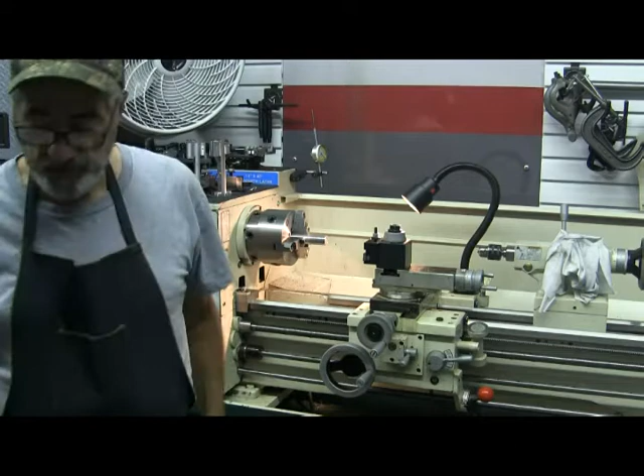Back to crank disc. I've drilled it and reamed it 3/16 inch, and I will chop her off here at 1/4 inch and stick it in the mill and drill a hole and ream it 1/8 inch in the face at the appropriate distance, which we'll cover later, from the center,

for the crank disc pin. It would be easier to hold in the mill if I gave myself enough to hold it with, if I parted it right here and then later parted the 1/4 inch piece off. But I don't want to waste that much aluminum. So I've got a way to hold it in the mill. It's fairly easy.

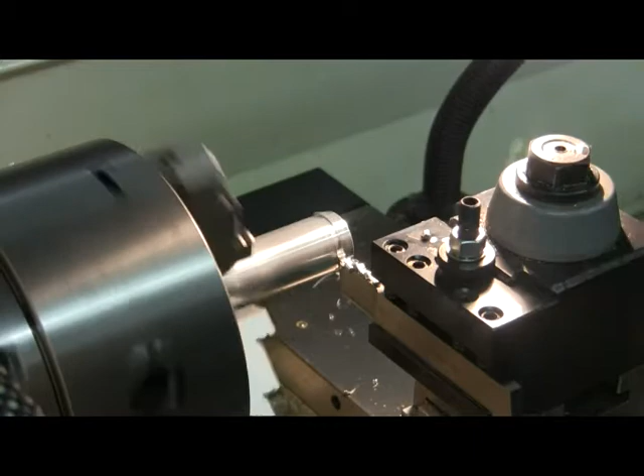Oh, that's kind of boring.

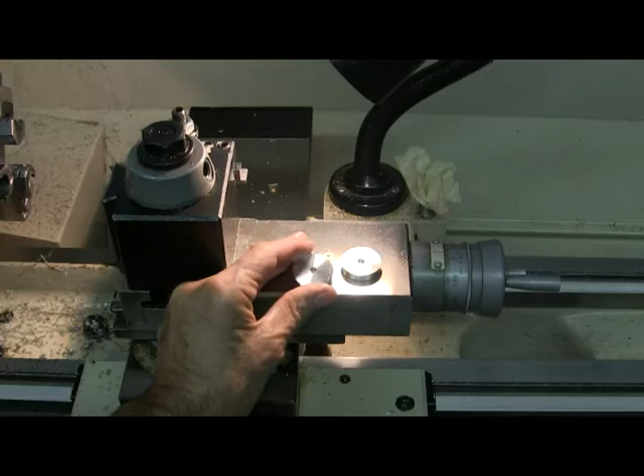That looks pretty good. Two almost complete crank discs. I didn't chamfer this side because this will be the outside, and I want it to be flush with the main shaft. This side on both of them is chamfered a little bit, or was it that side? Well, yeah, there we go. It's chamfered a little bit to make it easier to put everything together.

They're almost complete. I have to stick a 1/8 inch hole right about there, 0.375 from the center, and that's where the crank pin will go.

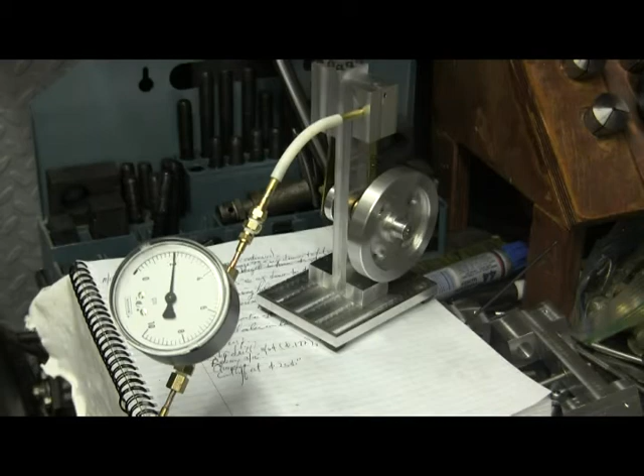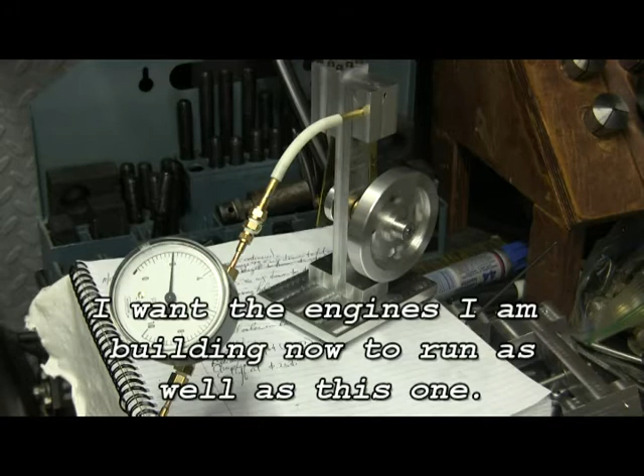This engine is running on 2 pounds. I finally bought a pressure gauge from McMaster-Carr that registers from 0 to 10. So it's running well on 2 pounds. We'll give it a little more.

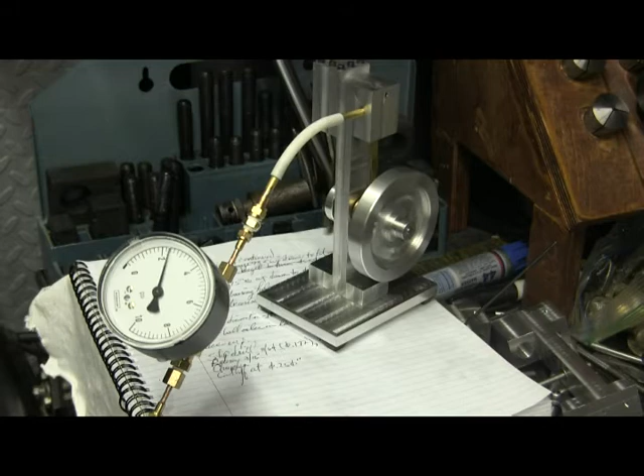There's about 3 pounds. There's 4. Down to about 2.5. So that's the goal for these 2 engines as well.

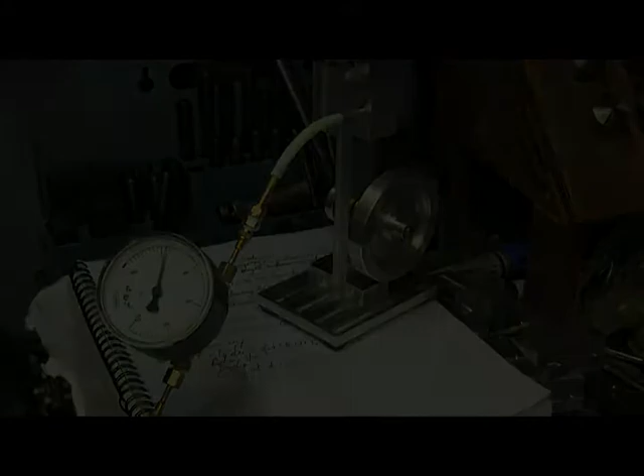That's about 3 pounds, because the bore on the flywheel is not concentric with the flywheel, not centered. I won't run it any faster. I need to rebore that flywheel and re-sleeve it. It's just one of those things I'm going to do.

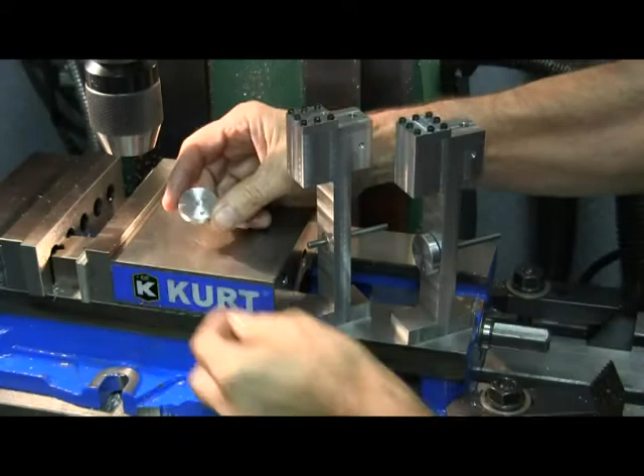Well, I've got both crank discs almost complete. This one's sitting on the main shaft. I need to put a set screw in them to hold them solid on the main shaft, because the main shaft is 3/16 and I reamed the crank disc main shaft hole 3/16 over. No problem.

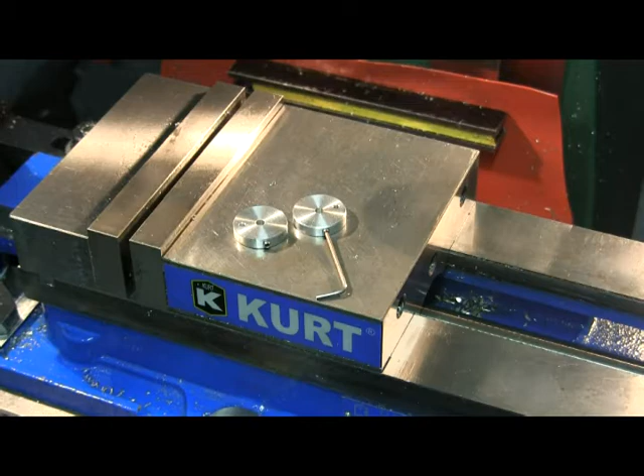In fact, did I do that on this other engine? Yes. This one's also got a set screw in it. The set screw is a little more machining, but it makes for easy assembly and disassembly, rather than pressing the main shaft into the crank disc. So I'm happy. They both have nice 8-32 by 1/4 set screws. That'll hold them on the main shaft quite well.

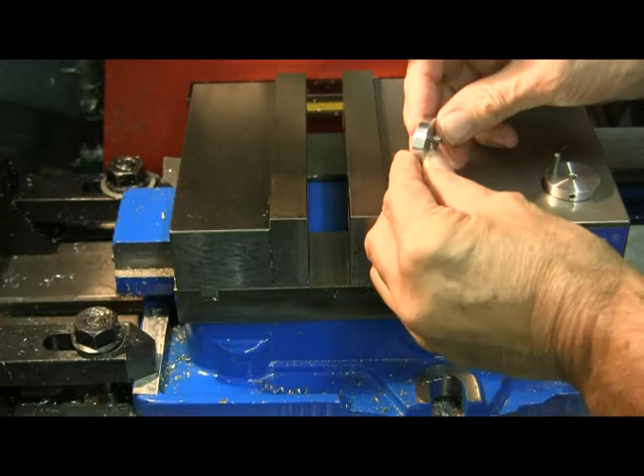I'm using the vise to press two 1/2-inch long pieces of 1/8-inch diameter mild steel into the crank discs as crank pins. This one's already in, and this one's about to go in if it doesn't fall out first.

See if we can get it started straight. Looks good. I can feel it when it hits the other side, right there. Looks good.

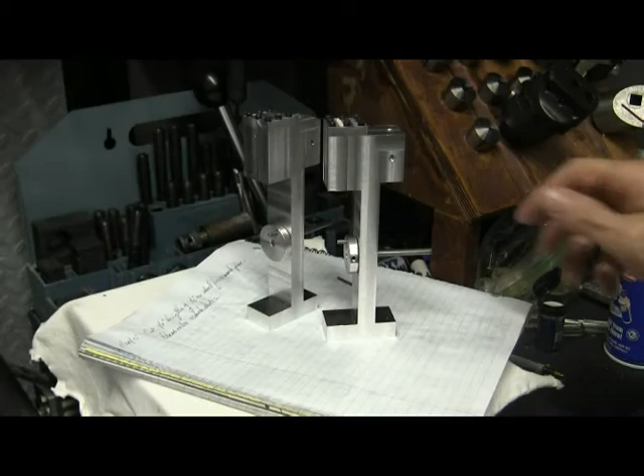Here's progress to date. Got the crank discs on the main shafts. You might be able to see how the crank discs bear upon the main bearing instead of the aluminum upright. Not real positive if that's going to show up, got the right angle or not. But anyway, it does.

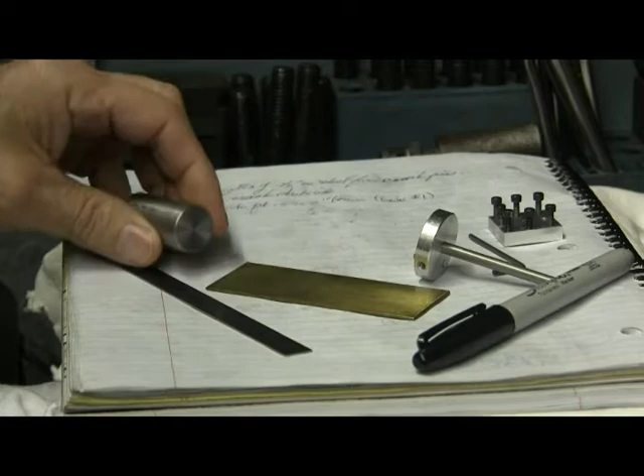I'm going to do the pistons next, I think. I want to turn this piece of 1018 into the piston. The stock is about 1.5 inches long. It needs to be 1/2 inch long. And the diameter needs to fit the bore of 0.5 something or another.

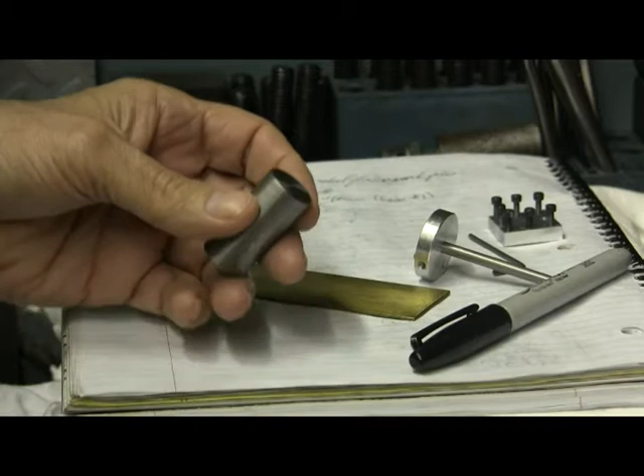There has to be a slot in it for the connecting rod, and there has to be a hole through it for the wrist pin to hold the connecting rod. Let me draw that up on here roughly, just to show you what I'm talking about, and I'll be back. Alright, I'm back.

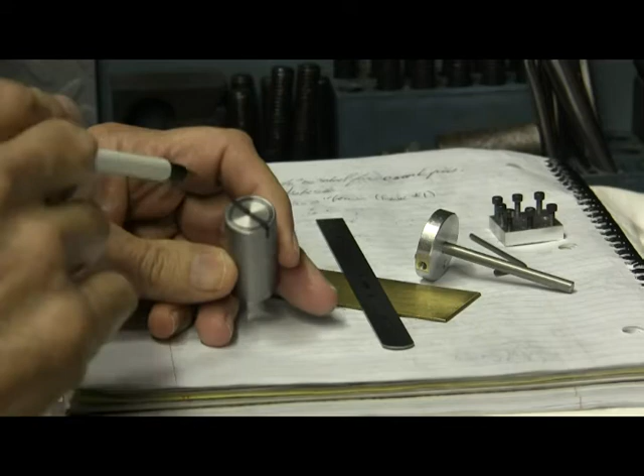There are basically 3 features we have to machine into this workpiece. Got to reduce the diameter. Got to make this slit for the connecting rod, and we have to drill a hole all the way through it for the wrist pin. Now the question is, what order do you do this in?

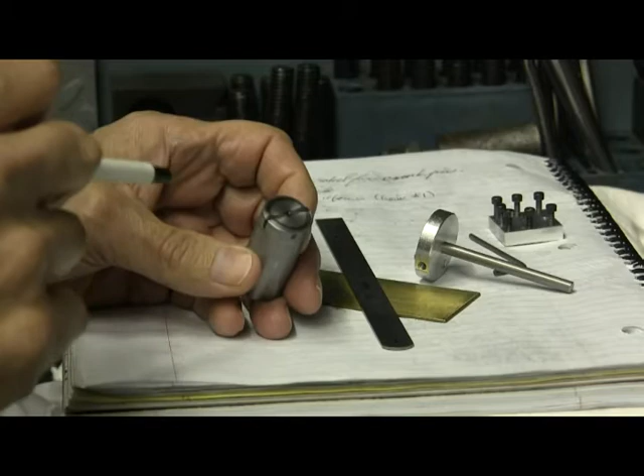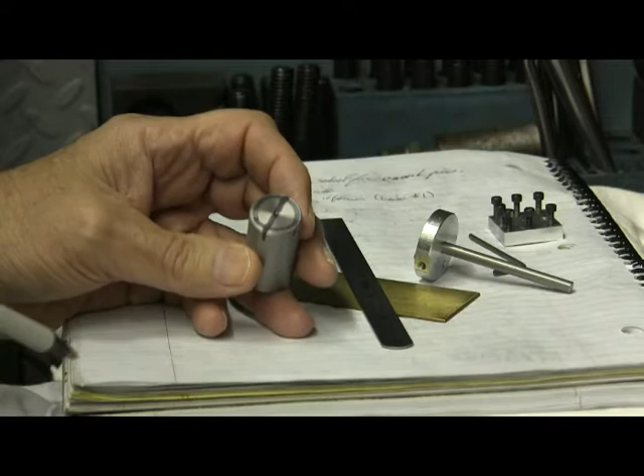I've made several of these pistons, and the first one I made, I decided to stick it in the lathe and reduce the diameter, and then to stick it in the mill and use a slitting saw to make this slit, and then to drill this through hole in it for the wrist pin. All that worked out real well, except for a couple things.

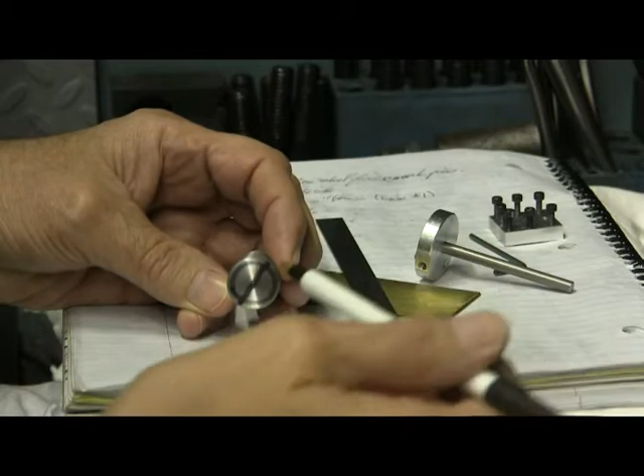I had reduced the diameter to fit and then created this slit. Well, the slitting saw on the trailing edge leaves a little burr right here. There's nothing taking that burr off, just a file, maybe not. Stick it back in the lathe and hit it with a cutting tool. Hopefully don't change the diameter. Probably would. Sandpaper. Takes a long time. There's a lot of work involved.

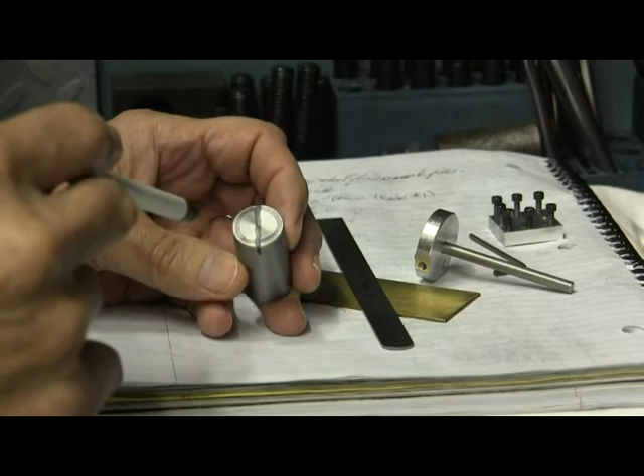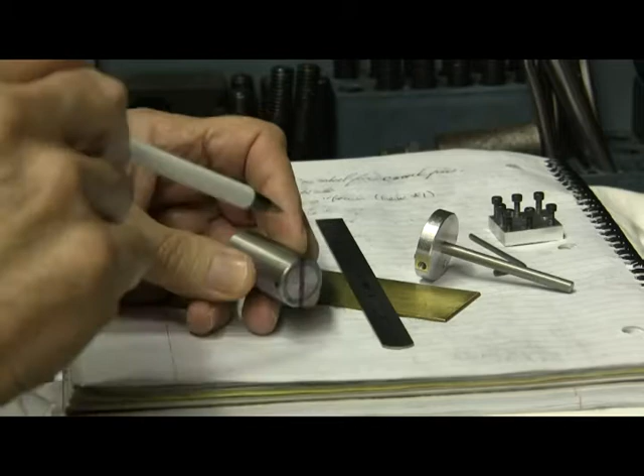So maybe reducing the diameter is not the first thing I ought to do. Maybe I ought to create the slit first, and then when I reduce the diameter, I'll automatically get rid of this burr. Well, what about drilling this hole? The first time I did it, I reduced the diameter, made the slit, created this burr, drilled the hole, and not only created this burr over here, it created a burr on the inside of this slit, which is real hard to get rid of. You got to use a flat jeweler's file to get rid of that. So that's way too much work.

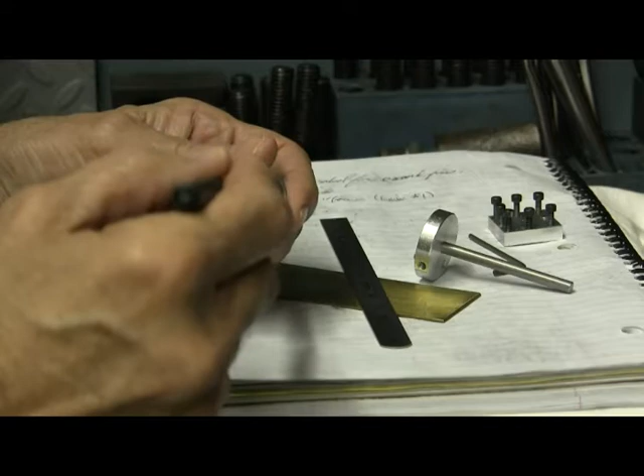We can fix all this by changing the order of operations. The very first thing I'm going to do is drill this hole. Okay, we got a hole. It's got a burr over here, but that's okay because we're going to reduce the diameter later. The next thing I'm going to do is make this slit. So when I create this slit, there is no burr at the hole slit interface.

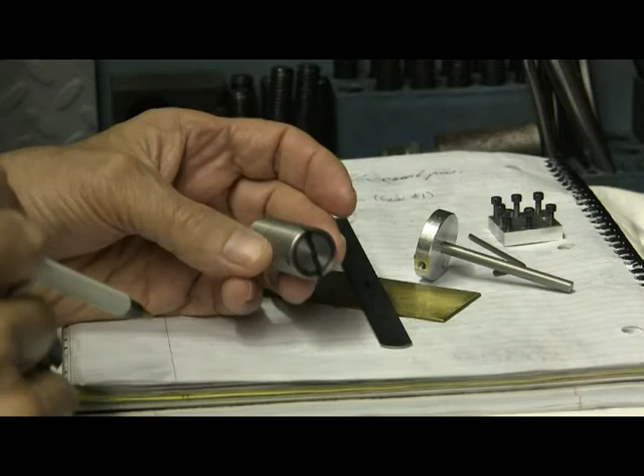There's a burr over here where the drill came out, and there's a burr over here where the slitting saw came out. But that's okay, because now I'm going to reduce the diameter and get rid of all these burrs. Now, of course, the problem with doing this, which is not much of a problem, is that this will be an interrupted cut for the 1/4 inch it is long, or however long it is. The piston will be 1/2 inch long. But that's not a big deal. So by thinking about the order of operations, you can save yourself a whole lot of work later on.

I'm going to turn the first piston out of what I think is 1018. I've turned it previously and the finish looks like 1018, so that's what I'm going to assume it is. It's 3/4 inch in diameter. I'm going to turn it down to 0.555, 2 or 3, something like that. Anyway, I'm going to turn it down to fit the bore on one of those engines, which is 0.555 something. So here we go.

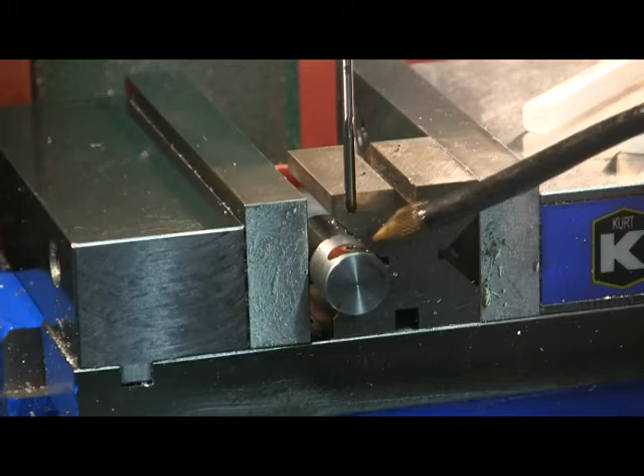I've through drilled it with a number 31, which is a 0.120 inch drill bit. Now I'm going to ream it to 0.125. I'm using Viper Venom. I'm turning that reamer at 96 SFM. That felt nice. I'll use plug gauges to see if I did my job. Actually, that's not necessary. It's 0.125. And what I will do is press the wrist pin through it, which will be a 0.125 inch dowel pin.

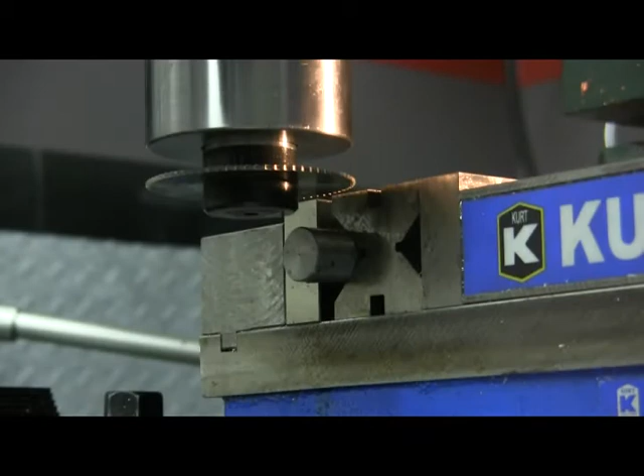It might be interesting to see how I'm going to find the center of that workpiece to cut the slot with the slitting saw. I could start off by just coming down here like this. You see the slitting saw, me moving it there? And this is the workpiece. I could come down there and feel the top of it, hit it right there, and set my DRO at 0, and then come down half the diameter of the workpiece and half the width of the slitting saw, and find the center.

But probably a more accurate way to do it is to take a feeler gauge. I'm going to use 10 thousandths. Put it right there. There, I can feel it now. And hold it right there and set my 0 with my third hand on my DRO. And then roll her out like this, and then come down the radius plus half the width of the saw plus 10 thousandths, and lock her in place. So that's the way I'm going to do it.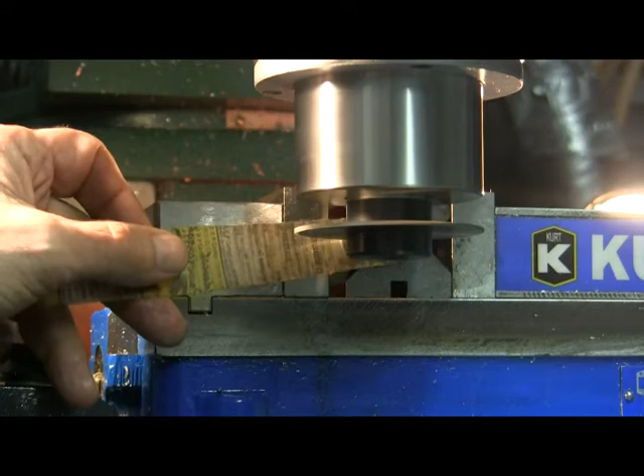Something else of interest. How do I find the end of that workpiece with the slitting saw without making a cut in it? Well, I'm going to use the paper method. I've got a piece of telephone book here, which is only maybe a couple thousandths thick, and I'm going to put it between the saw blade and the workpiece. Pull the workpiece to the saw blade until I can just feel the paper grabbing. There, can you hear it? Maybe not, but I can feel it. You can see that little cut it made. It didn't even quite go all the way through it.

It's important not to hold it tight, because if it grabs, you'll jerk your hand in there. So if it grabs, you want to be holding it loose, so it'll just jerk the paper out of your hands. So there's the end of the workpiece.

Now I'm going to move the workpiece this way and then decide how many thousandths per cut I'm going to take. I'll pull the table towards the camera and take that many thousandths. I haven't decided yet. I'll do a test cut and see how my setup is holding, and then work my way into this slot, which is going to be a total of 0.200 inches deep. So I'll set the dial on my y-axis to 0, and then pull it in per cut until I get to 200 thousandths.

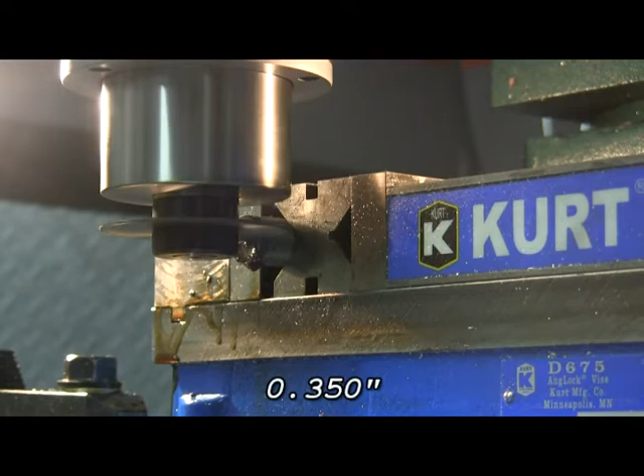When you're using the slitting saw, you want to always do conventional milling. You don't want to do climb milling. Look that up if you don't know what it is.

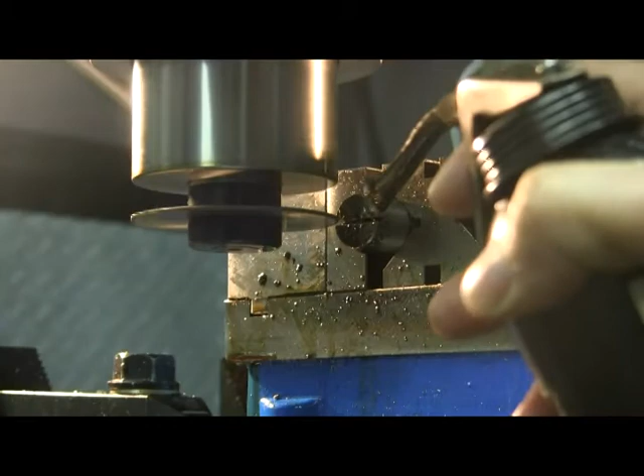It's important. This is the last cut. I'm going to take it at 40 thousandths instead of 30. Do the math, it just worked out that way.

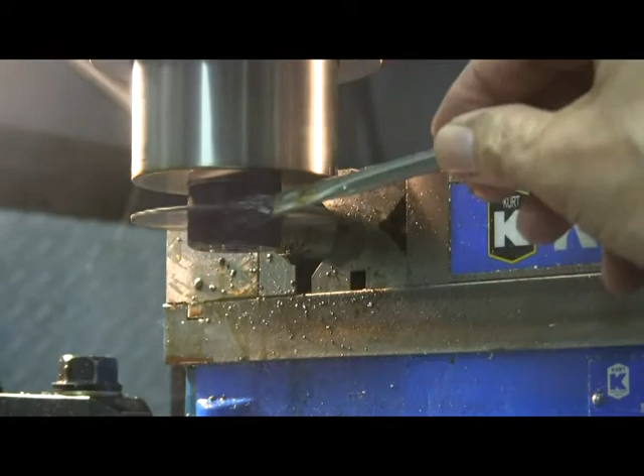It's important to keep the slitting saw well lubricated. See how easy that 40 thousandths cut went? That was the largest one I took. That was a very, very gentle cut.

And there we go. Let's see what it looks like. It looks pretty good. Blow it out.

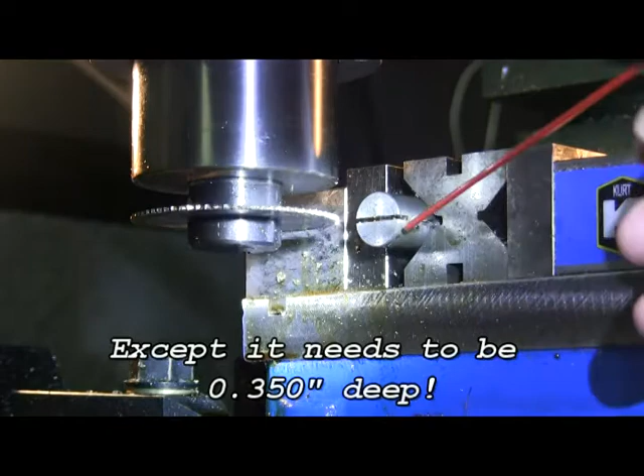You know, I said that cut's supposed to be 200 thousandths deep, but it's not. It's supposed to be 350 thousandths deep. So we've got some more work to do. I'll let you see it when we're finished.

Now this is the last cut, I promise. Since I had 150 to go, what I decided to do is just take 50 thousandths per cut. That way I have 3 cuts.

A little LED lighting on the subject might help. You see it there.

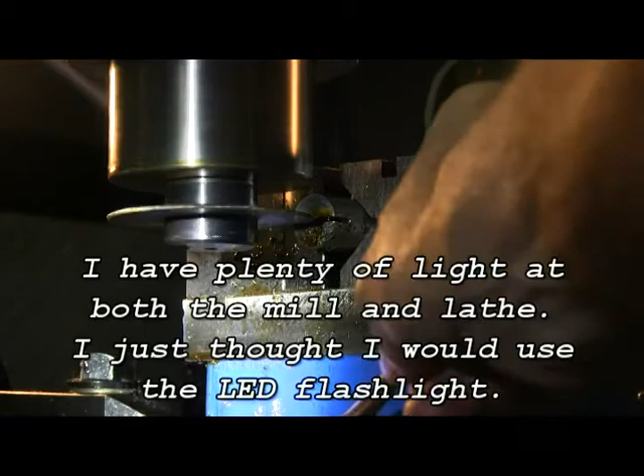Notice I'm reusing the cutting fluid. Oh, that's dripping on in a pocket on the vise.

Use Viper's venom. There we go.

Another word about slitting saws: don't buy cheap ones. If you buy cheap Chinese slitting saws, you'll pay for it. They're more expensive than good saws because you'll ruin your work, you'll break the saws, you might get hurt.

Just buy them from someplace like McMaster, or someplace like that. There's a lot of good places. Buy brand name slitting saws. This one's a Thurston.

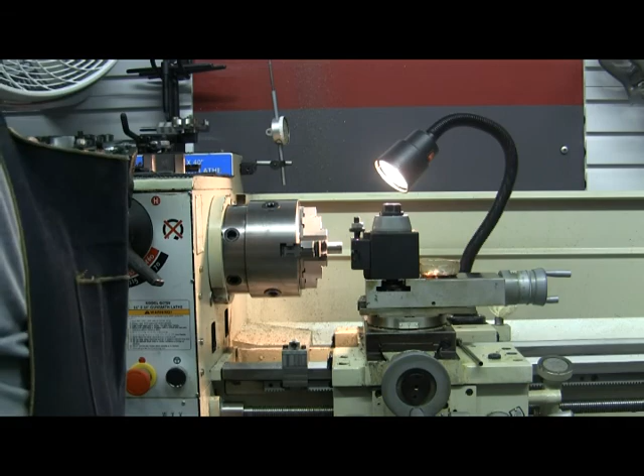So here we go. I've got her turned down. Let's see if it'll fit.

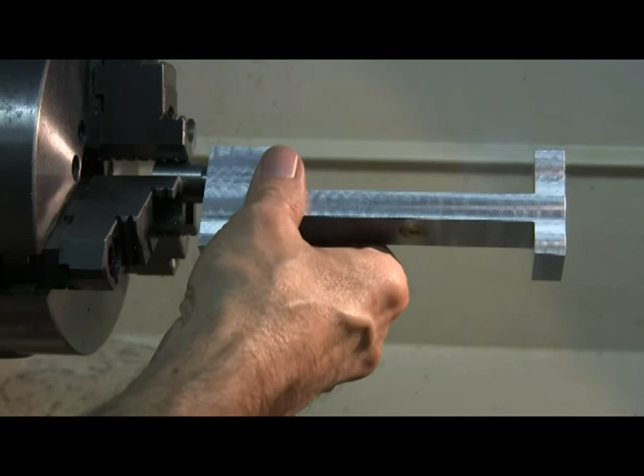I like it. It's time to part it off. There's the piston. Got to face this end. If I've got it in focus, you can see that stub sticking out there.